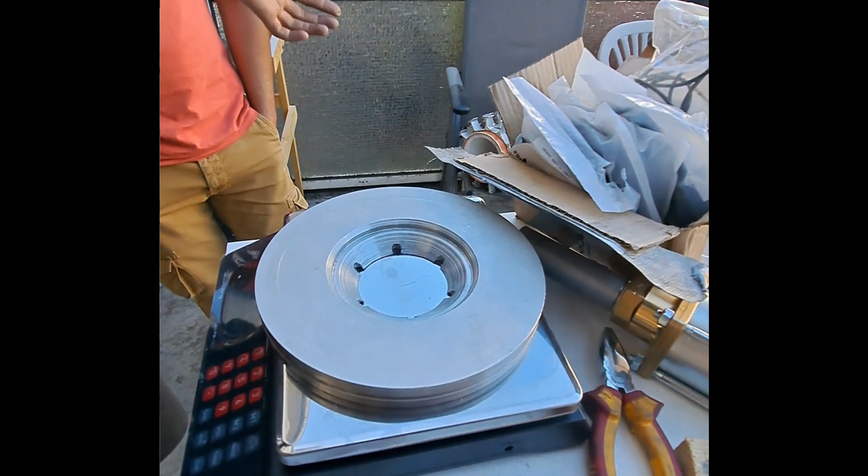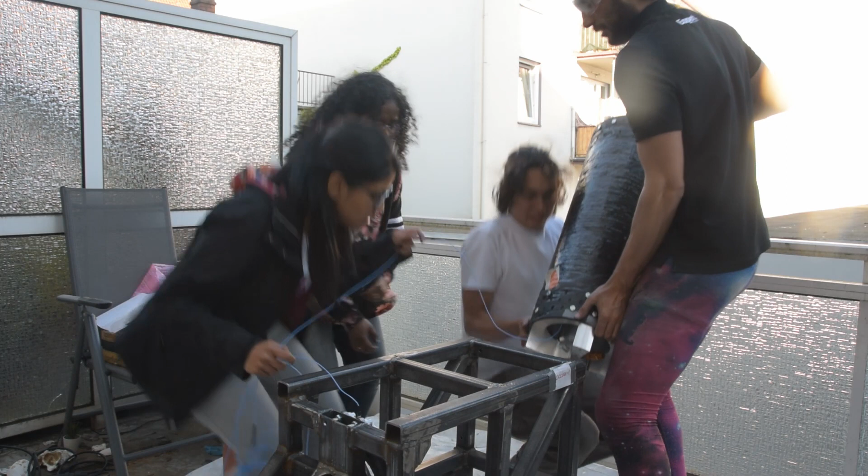Because of our primary goal of just trying to get stuff to work, we've kind of overlooked the mass problem for the rocket, and she's coming in a bit heavy. Of course, this is a problem for a rocket because if you have too much mass, you don't have enough thrust to get off the ground. So now we have to turn to some other solutions for how we can save some of that mass.

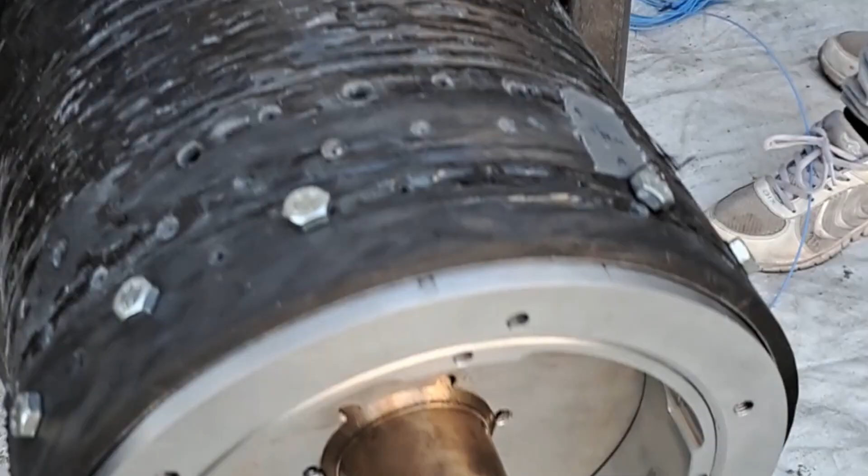And one of the places that we've turned to is the retainer ring, which looks like this. It's basically the device that we're using that will hold the nozzle in place and keep it attached to our combustion chamber. Now, our initial design for this structure is quite simple. It's basically just an aluminum block, which has a little bit of lathing in the center to align it with the curve of the nozzle. But other than that, it's a fairly simple piece to make.

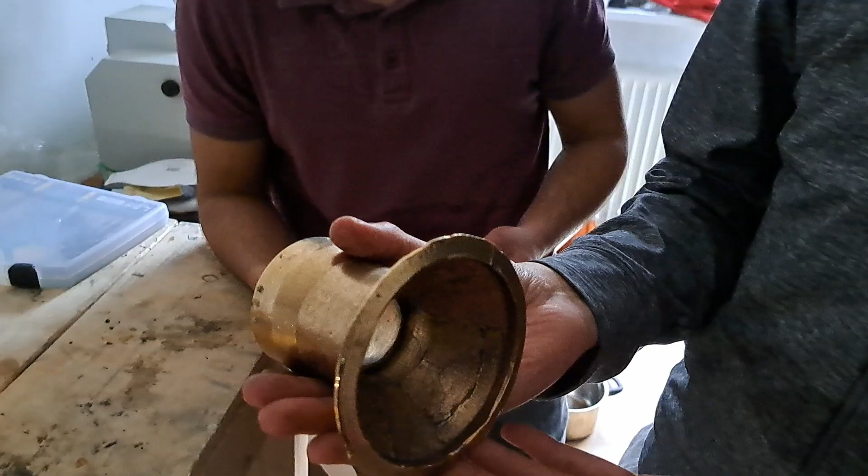But it turns out that from a structural perspective, there might be some room for improvement. And this is what led us to the world of topology optimization. Let me hand over to Atharva, who's the expert of topology optimization in our group. Topology optimization is a technique of minimizing the mass of a solid component without reducing its structural integrity. So we use Altair Inspire to run an optimization simulation, and here are the results.

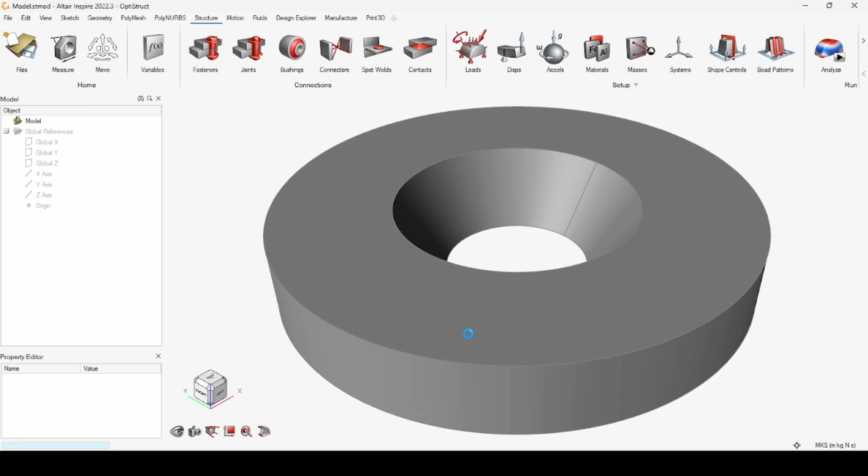So it started with opening the file which I had created in another software. As you can see, it is entirely solid and it has a lot of mass. I wanted to optimize this surface. There is excess mass here. Creating an optimized part in Inspire is quite easy. I only needed to add the force and the support for creating a successful topologically optimized part.

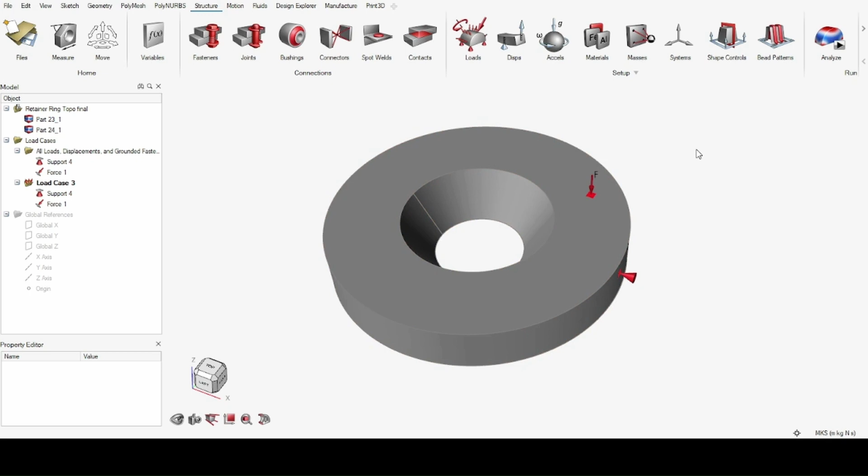So I went to the structures tab, and in here I could find the supports which are applied to this circular surface, which is going to be supported by the combustion chamber of the rocket. Then I went to the pressure and applied the pressure force over the top of this surface. It is going to be pressurized due to the fluid pressure of the combustion fluids.

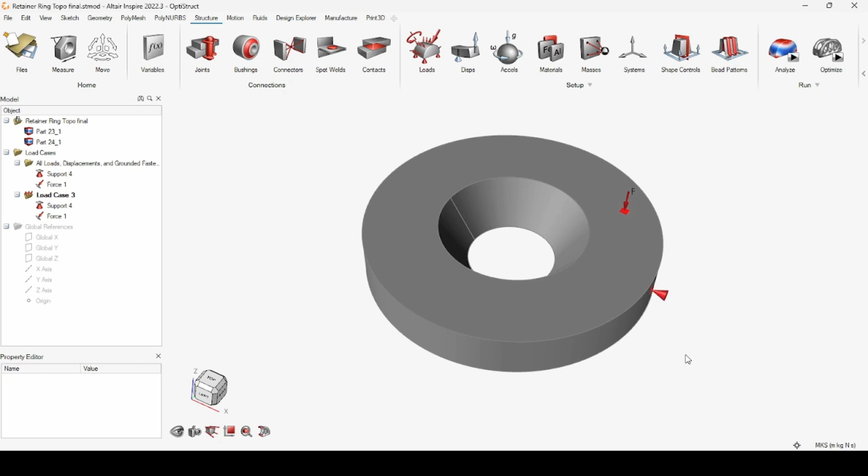After applying the support and the pressure force, I went to the optimize option and started optimization. Then I selected the minimize mass option here. I gave it my required safety factor. I gave it some constraints and then just pressed on run. That gave me this beautiful optimized part.

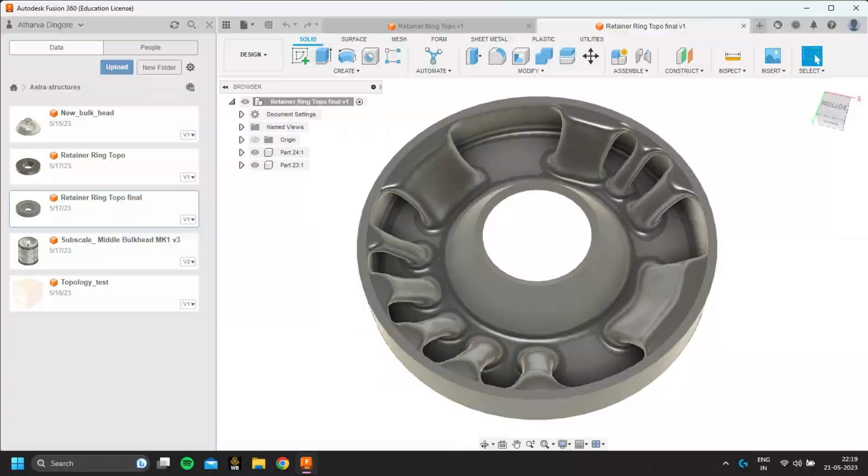As you can see here, it has created supports only where more stress is generated and the rest of the geometry is hollow. Inspire creates these amazing three-dimensional curves which support the structure only at the places where maximum stress is generated. This is the beauty of topology optimization models, which create these amazing structures and remove all the unnecessary material, keeping mass at a minimum.

As you can see, with this technique, we're able to get our mass of this ring all the way down to around 600 grams. That saves nearly a kilogram of mass off of this initial design. Now, a kilogram may not seem like much, but for Karma, that's like 2% of its dry mass, and every kilogram counts. If we use this same technique on some other structures on the rocket, we may be able to save even more mass.